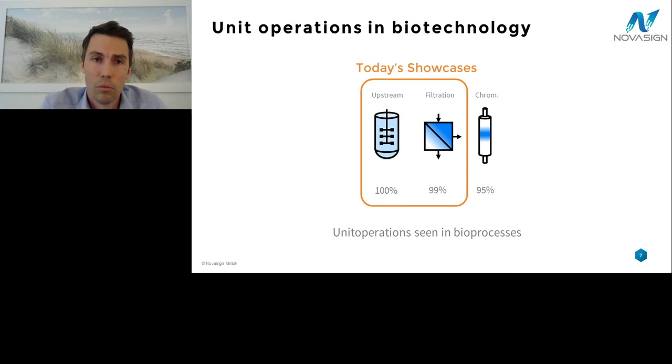And finally, also chromatography. In red biotech, we also always have chromatography. In white biotech, it's not so often, but still over the whole frame of biotechnology, I think these three unit operations are really driving the market. So today I want to show you two showcases. One is for the upstream bioreactor and one is for the filtration process.

We start with the upstream bioprocess. And here I have a showcase from an E. coli fed batch cultivation, a 20-liter reactor. What we were interested in there is we had three critical process parameters: temperature, feeding rate, and induction strength. These three parameters were supposed to drive the target parameters, the critical quality attributes, which are in this case the biomass and the product.

So if you look at this design space, it's quite clear that it is an immense experimental effort, because each of these points represents one experiment, and one experiment in this E. coli cultivation is 1 week. Not as long as CHO, but still, if you do all of these experiments, that means you have to do 27 experiments, which cost you at least half a year of experimental work to understand the whole design space in the full factorial way, okay?

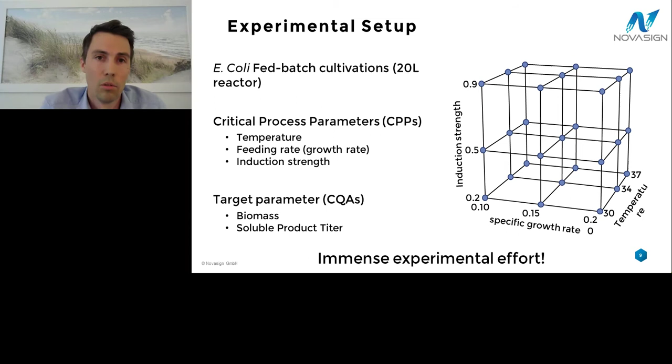What people are often doing is they take ordinary DoE tools, so they have the design space, then they perform their experiments, and then they look at the endpoint of the process, then they build a model. You can use JMP, MODDE, MATLAB. There are a lot of tools actually. You can build a model to describe the relation between the inputs and the outputs, often for the endpoint.

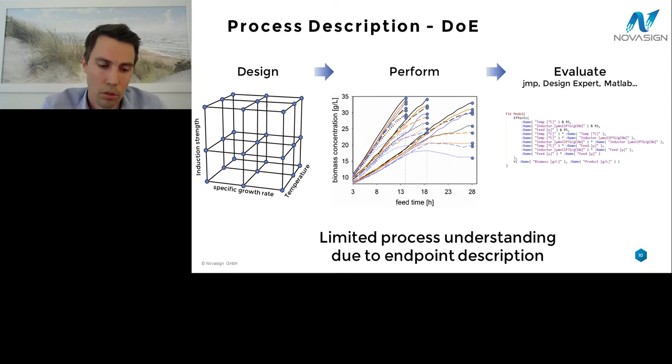But there's actually a limited process understanding if you only look at the endpoint and you do not model the whole process in a time domain. As an example, you can see this here. The response variable might be the titer over the process time, and this is a comparison of 4 different runs. If you look at the endpoint, there are actually infinite possible trajectories for how you get from the start to this endpoint. So for this particular run, you might have these three options.

And if you do not sample over time, and in the next step, if you do not model over time, you have this so-called DoE knowledge gap. So if you model over time, let's say this is the true run, you know, okay, this is the trajectory, this is how the process develops.

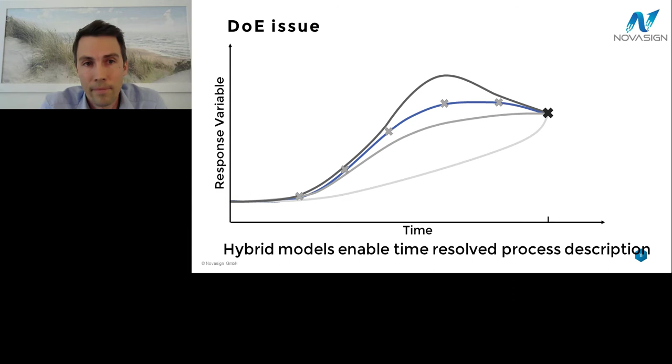And if you look at this over time, the first thing you will realize is there's no need to run this process for this particular time, because if you stop earlier, you might have the same process yield at the end, but the space-time yield is much higher, because you don't have to perform the whole run. That's the first thing. And the second thing is, when you also take samples over time, you can really build up a very valid process model, which describes the whole process. And this, in our case, was done by hybrid modeling. You can see this here.

So we have three input parameters: temperature, feed, and induction. There's a little thing not right, but never mind. We have these three inputs: temperature, feed, and induction. These three inputs are used in an ANN. And this artificial neural network then predicts two rates. The first rate is the growth rate, the mu, and the other rate is the product formation rate.

And by doing so, we feed these rates into a mechanistic model. This mechanistic model gives the whole model a certain structure. This is why it's called hybrid modeling, because we have the ANN, which is a black box or data-driven model, and the other, the white box, is driven by differential equations. And as the output, we have two output variables. One is the biomass and the second is the product.

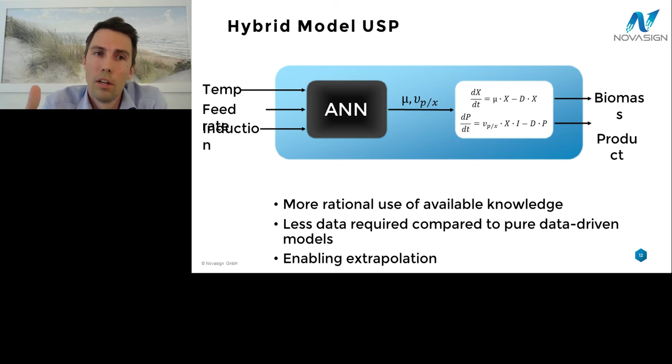Okay. And comparing the outcome of hybrid modeling with pure black box modeling over the whole time domain, you can see here in a simple example the biomass prediction and a scatter plot for the pure data-driven model. On the x-axis is the measured value, and on the y-axis you have the value predicted by the model. So if you had a model that perfectly fits all of your data, you would have a straight line.

However, we also know that we have a certain analytical impreciseness. There's an inaccuracy in the measurement. We know, for example, for the biomass, we did this in our experiments where we performed 7 rounds the same way. And then for each of these points, you can measure the biomass and see how much they deviate. In our case, something like 5%.

What you can see from this comparison between the pure black box model and the hybrid model is that the hybrid model, due to this given structure we introduced by the mechanistic equation, the predictability of the outcome is much higher. And you can also see this in terms of the time domain.

So while in the upper graph there was a scatter plot, when you take one of these runs out of the scatter plot and plot it over the time domain, you can see, for example, how the pure black box model performs over time and how the hybrid model performs over time.

And what we also did is we aggregated several models. That means we did a bootstrap approach. So you take several models and you take the average of these models. And this average gives you somehow a confidence interval of the model. It's not a real confidence interval, but it says how many different models you have and what these models predict. If this confidence interval is quite broad, all of the models are quite different. And if it is very small, your models are quite similar.

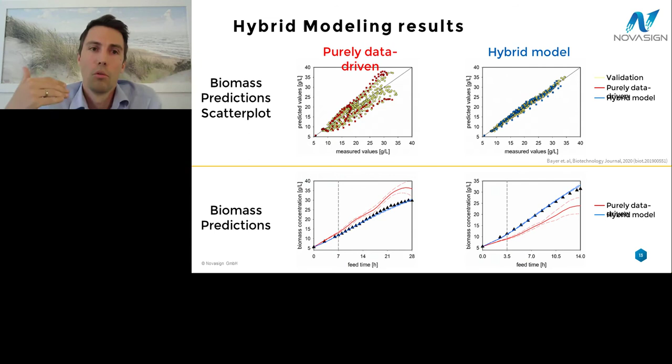But so far, we were able to describe a process, which is nice, but you didn't save any time. My initial argument was to save time, and this is what we really want to do. Hybrid modeling in this case is like the commodity. You have to describe the whole process first, and if you have a tool that is able to accurately describe the whole process, you can go one step further and really save time. And this is what I will show you now.

We have the approach of intensified design of experiments. So what does this mean? When you have a full factorial design space, what I told you before is these 27 experiments. Each of these points represents one experiment. We have 27 experiments to conduct. It means half a year of work to screen the whole design space.

But you can also take a fractional factorial design space. That means you take out some of these runs and you only perform, in this case, the borders, these 4 points in the top and the 4 points in the bottom plane and the center point. By doing so, you save 66% of the experiments, and you learn the same as if you would take the 27 experiments.

And this is what is done in industry quite often, because if you consider a CHO fermentation, for example, where you have 6 to 7 parameters you change on 3 levels, you have 3 to the power of 7. You cannot do a full factorial design space because this would take infinite time. So you have to take points out and reduce the number of total experiments.

You can either do this with the fractional approach, but you can also consider intensified design of experiments. Here you try to still do all the experiments in the design space, but not each point represents a whole run; you change process parameters during the cultivation. From the blue plane, for example, all of the 9 points are covered by one of these lines. A line starts in a certain point and then covers 3 of these points.

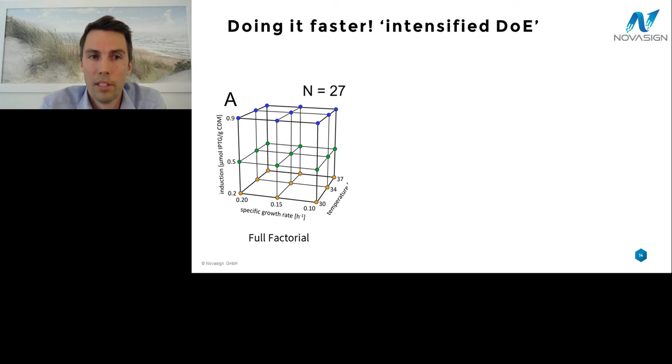Then you can make a comparison. For example, if you compare the 3 tools, the DoE only at the endpoint, because we just look at the endpoint for this particular thing now. We only look at the endpoint for DoE. We compare the model predictability by taking all the points in the hybrid model and also doing the hybrid model with this intensified design of experiments.

So while we have in the DoE 31 experiments in the training set, in the hybrid model we took 25 in the training and validation set, and 6 in the test set. And in the hybrid model we only have 9. And to test the hybrid model, we took the hybrid model from the intensified runs, so the 9 runs, built a model and tested this model then on the 31 experiments.

The reason why 31 is stated here is that we performed some of these experiments as duplicates. So we don't only have 27 experiments, but the full design space was 31 experiments, still covering the whole points described here.

And as I said, we performed the hybrid model on the data from the iDoE. So we built the model on the iDoE data. And then we took this model and predicted the concentration for the biomass and the product on the statistical design of experiments, so on the full factorial design of experiments.

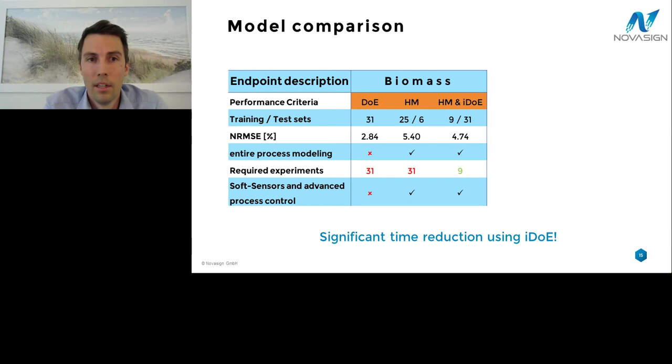Okay, then let's go to one of the examples just for a single run. So here's just a single run over the time domain. We compared the 3 different outcomes from the hybrid model built on the full factorial design space, the hybrid model built from the intensified design of experiments, which is the green one, and the hybrid model built only on the fractional design space, which is the red one.

And you can see that for sure, the hybrid model built on the full factorial design space, which is the blue one, performs best. For sure, you have the most data to learn from. But you can see that the iDoE model, which learned from the 9 iDoE runs, is also quite accurate, and the bars of the model are not as broad as for the fractional factorial design space.

And the huge benefit is, you learn from the whole design space, you take up the whole dynamics from that, and you save 66% of the time, which is a huge benefit.

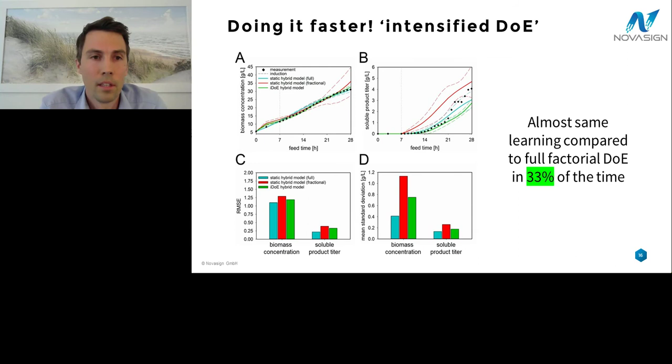Okay, coming to the soft sensor application. As I said, we just built this model based on these iDoE runs, and you can transfer it back and say, okay, why not do something different, perform experiments in the lab or on the shop floor, or wherever you are, and use these models as soft sensors so that you have a real-time prediction of your biomass and your product during the new cultivation.

Okay, and this can be done quite easily. We have a hybrid modeling toolbox. We build this model inside our hybrid modeling toolbox. You can export this model as a DLL file, and then you can import it into the environment you are using. In our case, we're using Evon XAMControl, and we are importing the DLL file from our toolbox into it, and I can show you afterwards how this soft sensor performs.

Check out the video. You will see at the beginning of the video how the DLL is imported, how the model parameters are mapped with the OPC parameters. So the three model parameters we have are mapped with the corresponding OPC parameters in the environment. And then we just start the cultivation, and we see a time lapse of how this propagates over time.

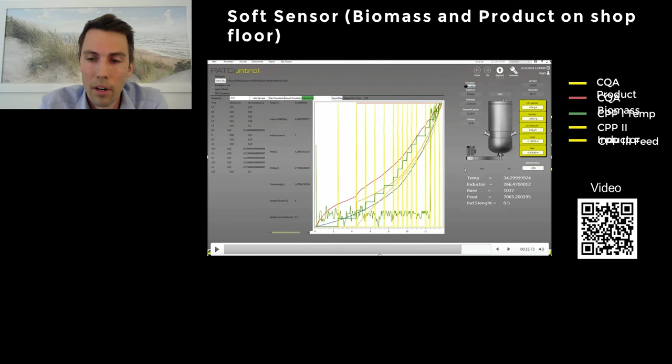Okay, however, I also have the outcome of this for you in a simpler slide. As I said, we performed the iDoE runs on this design space, and then with the soft sensor we performed a completely new run. So we did a different iDoE run. We started with this condition. After one generation, we switched to this process condition, and after another generation, we switched to this process condition. Okay, you can see this here.

So you have the prediction of the soft sensor in black; this is what the soft sensor predicts in real time. The offline measurements afterwards in yellow would give you the real numbers. These are the real numbers compared to the soft sensor numbers. And the advantage is obvious. While the soft sensor is in real time, you have this number right away. The yellow offline measurements come in 1 to 2 days.

This is the first thing, and the second thing is that the soft sensor, how it is built, is also a predictive soft sensor. That means you can simulate, because our inputs are the feed, the temperature, and the inducer, and you can simulate how much you would feed into your process in the future. That means you also get this curve already for the future. This is also a huge advantage if you build models with a valid model structure, and the inputs are factors that you can control.

If you take an input factor, for example, from some spectroscopic measurements, you have other advantages, but the disadvantage is you cannot look into the future because you don't know what the signal will be in the future. And also, when you think about predictive control, you cannot change the signal of a parameter, for example, in order to get more product out of it. You can only do this if you build your model based on variables you can control.

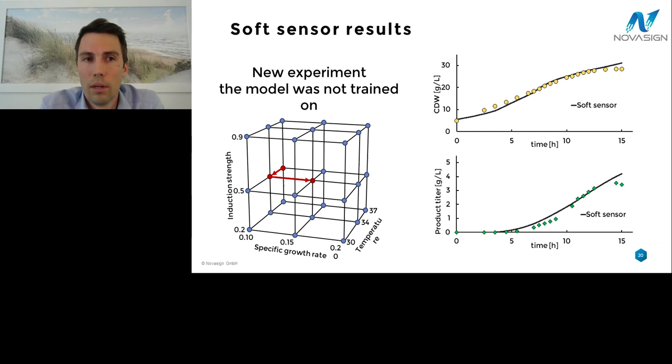Okay, so summing up the upstream part: this hybrid model is more suited to describe bioprocesses than DoE or black-box modeling. Second, the iDoE significantly saves process characterization time. And thirdly, I hope I could show you a simple implementation of a soft sensor on the shop floor or wherever you want to apply it. And it can be easily used to access both the biomass and the product in real time.

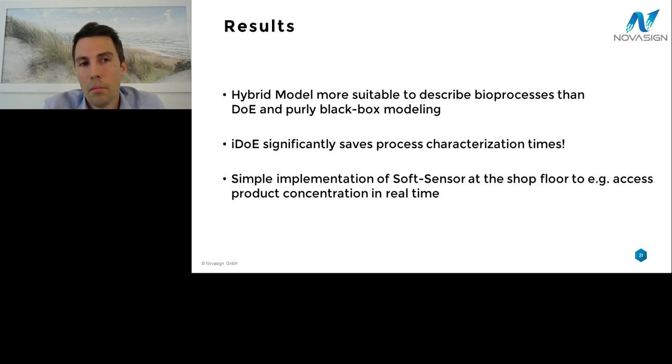In this particular case, if you have other process variables, if you have other quality attributes you're interested in and you measure them, you could also predict them in real time. Okay, now coming from a different topic, I think I could show in the upstream topic why a hybrid model is very useful there and how this could speed up your process.

The second thing is now the downstream showcase, where it is about tangential flow filtration. Just as a short reminder, what is tangential flow filtration? You have a certain target of interest in your tank, and you concentrate this in. That means you pump your solution through a membrane cassette, and everything that is larger than the pore size of the membrane cassette stays inside this flow, and everything that is smaller just goes through the membrane. That means you concentrate your protein solution in, and this is a time-dependent process.

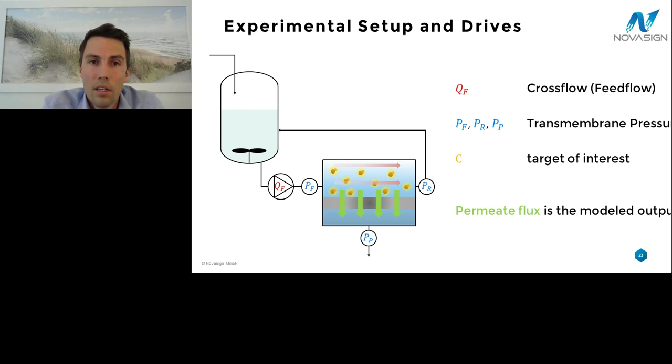And there are a lot of parameters that are responsible for this permeate flux. So the permeate flux is what goes through the membrane. And in our case, we build a model based on the cross flow. So the cross flow is one input parameter, the transmembrane pressure is one input parameter, and the target of interest is for sure one target parameter. Okay. So here we go.

And the objective of this is to have a prediction of the duration, how long this process might last under certain conditions. So let's say we have a certain TMP, a certain concentration, and a certain cross flow. How long would this process last? And for different concentrations, so let's say you have a certain variation in your process, plus minus 1 gram coming from a certain column, then you also have different outcomes.

So if you have a model that can describe the duration under certain conditions, you can take action and you can change them. So we want to build a generic model. The second thing, that can be used in different operation modes. I will explain what I mean with this afterwards. And developing a digital twin is the third point.

Okay. So the hybrid model structure here is somehow similar to what we saw before with upstream. We have 3 inputs, TMP, CF, and concentration. We predict the flux, and the flux then goes into a mass balance, and from this mass balance, we calculate the concentration at a certain time point. And we take this concentration, put it into a multi-step hybrid model, and do the same thing again. And by doing so, we could look into the future how your process will develop.

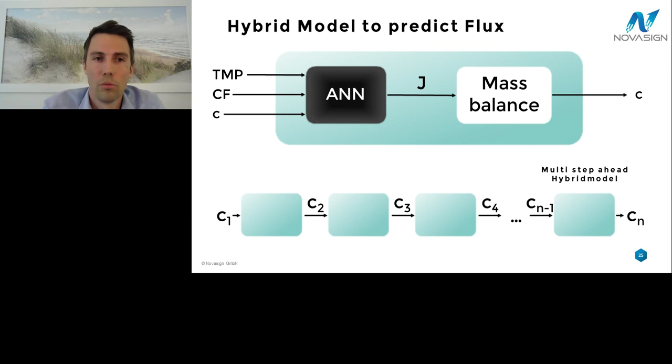I will show you this in this sketch. So what you will see here is you have the tank where you have your protein of interest. This is the yellow thing to the left. And when we start the process, this volume will decrease, and also the flux will decrease. So when we have low protein concentration we have high flux, and the higher the protein concentration in your system gets, the lower the flux gets. What you see right here is the outcome of the model, how long this process will take, in this case 70 minutes or 50 minutes, and then you start the process.

And what you see now is the real process. So here you see the real data, and this is how real data propagates over time. Exactly. So you see that the model is quite accurate, and it's easier than in the upstream because the uncertainties are not so high as in the upstream. The things you're looking at and the model parameters shown here are really almost 100% describing the process. Okay, so this was for a batch operation, but you can also use this model with low error for different unit operations.

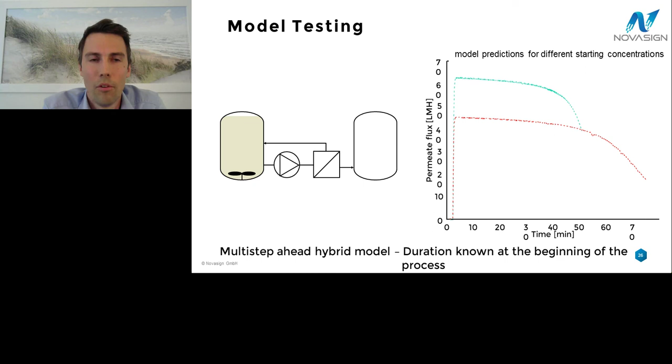Here comes the power of the hybrid model, because you can also use it for fed-batch TFF. What does this mean? Well, fed-batch TFF is something that is typically done in large scale, because you have a small tank and you have a large surge tank with a higher volume in there. So overall, the volume is too high for the small tank. That means you concentrate in the tank, and the volume that goes to the permeate is filled up again by the surge tank. And by doing so, you see a different behavior.

You see this on the upper right here: while there's still volume in the surge tank, you see almost a pseudolinear line. And once the surge tank is empty, you can see that there's a steep decrease in permeate flux. And the power here is that we learn from the data, but due to the fact that we build a hybrid model, we are able to predict both the batch TFF and also the fed-batch. What we're currently working on is the second part, and the second part represents this steep decrease in the permeate flux.

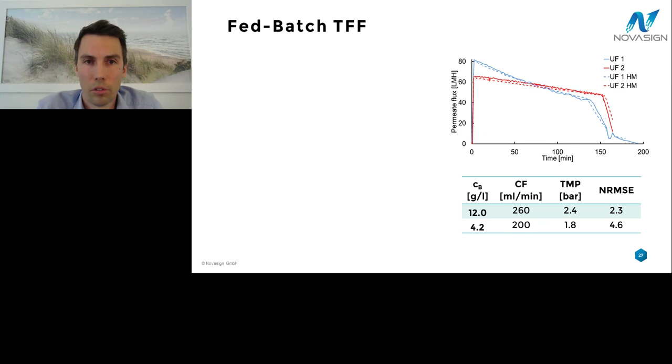You can see a similar error here for different process conditions. Okay, but when you have this hybrid model that describes the relationship between your membrane and your protein, you could think about different unit operations. So you have different operating modes. You have the batch mode. You can also think about the fed-batch mode.

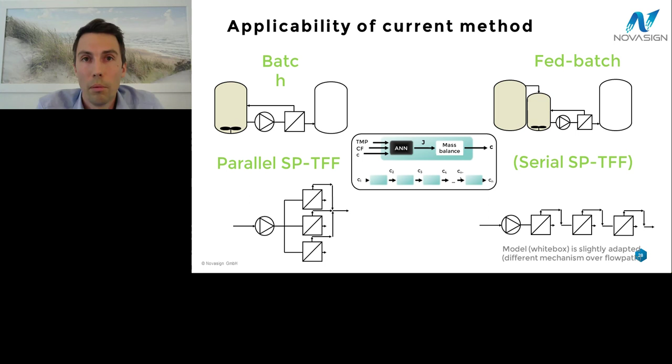But since you know the behavior between the protein and the cassette, you can also think about parallel SPTFF or serial SPTFF. You have to change some things in the mass balance or in the white box, but still, due to the fact that you learn from the behavior how your membrane reacts to the protein, you have a very high learning rate, and you can extend this model on different operation modes, which would not be possible with a pure black box model.

Okay, finally, we also have a digital twin application here, and this is what I said before: due to the fact that we learned from the behavior of the membrane to the protein, we could also model different situations. So let's say you have a different starting concentration, but you want to keep the process still at 40 minutes. If this is a time slot you're interested in, you can consider how you have to change the TMP and the cross flow in order to finish also after 40 minutes.

And you can see a simple example in this sketch. So the algorithm iterates through. So let's say we have a 1 liter reservoir, and we want to finish after 40 minutes. So the algorithm iterates through until it finds the optimum conditions to be finished with a certain volume that you set up front, be finished after 40 minutes.

And with this digital twin application, you can really model your process in order to deal with different situations. So if you have, as I said, a different protein concentration at the start, or a different volume at the start, you can model all this very simply with this approach.

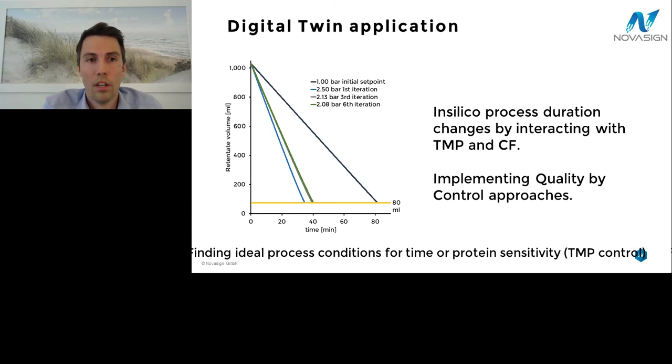Okay, so this brings me to the results of the downstream topic. We have a multi-step ahead hybrid model that can predict the outcome of this process already at the very beginning of it. Only a very small training set is sufficient, so you can do normal TMP excursions as you are used to in industry. The only thing you have to consider is that you need a device that has a TMP control, because if you do not control the TMP, it's clear that if you have two variables that you don't know, you cannot model this process. So you have to have a system that is able to keep the TMP constant over time.

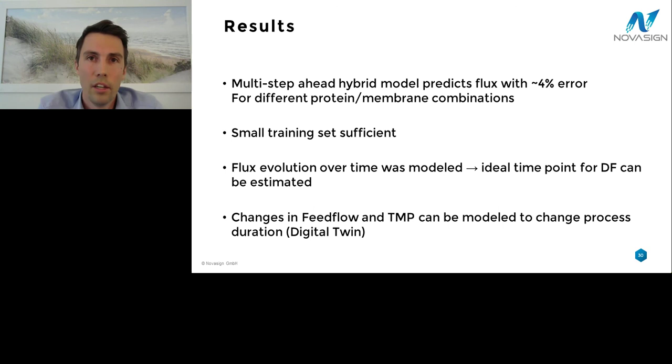Okay, and then the flux evolution over time was modeled, and the ideal time point for DF, for example, could be estimated. So when you know the ratio where you want to change to DF, then you already can describe this outcome. Okay, and also the twin application, what I showed you last, is that with this simple thing, five minutes before you start your process, you can set the ideal conditions you want to have in the process, and at the end, it will lead to your desired outcome.